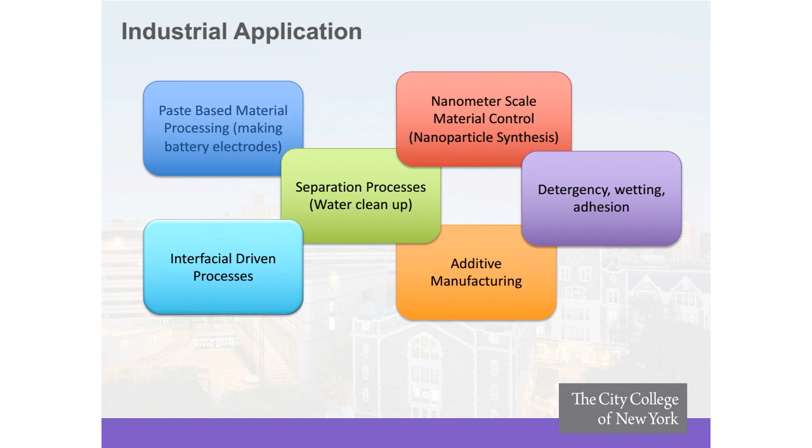to print both metallic and insulating materials, and eventually evolving these techniques to be able to print things such as batteries by using multiple inks, an ink for the anode, an ink for the cathode, an ink for the electrolyte, and an ink for the separator in one unique step, looking at paste-based processes, which are involved in things like making battery electrodes, and finally understanding the processes at interfacial driven materials and reactions, such as what happens at the interface of a metal anode and the electrolyte, and what controls our ability to generate power out of that corroding anode during the discharge of a battery.

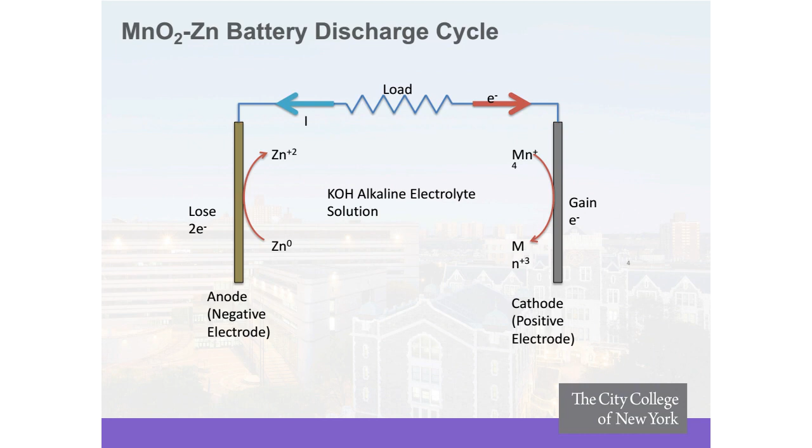In the first example that I've mentioned, we are focusing on batteries that are using the chemistry of the manganese dioxide zinc metal anode. In these cases, I'll focus exclusively on the anode for the purposes of this presentation. We basically have metallic zinc that upon discharge actually corrodes, oxidizes from Zn0 to Zn2+, and the Zn2+ species are actually soluble in the alkaline electrolyte that we use. During charging, these species actually replate onto the anode by accepting 2 electrons, and they form metallic zinc again.

These processes, while they appear to be very simple, are actually complex in the sense that we do not know what intermediate species adsorb on the metallic surface. We also do not know what the rate limiting steps for these processes are. And at the same time, on the actual anode, there are other competing reactions, such as the electrolysis of water that generates actual hydrogen during this process. And so, in order for us to be able to increase the efficiency of the battery, we need to minimize the parasitic reactions, the electrolysis of water, while figuring out how to overcome kinetic or mass transport limitations during the charge and discharge of the zinc anode during the battery operation.

If one were to focus on the particulate nature of the zinc anode, one will understand that the zinc particles, as they undergo corrosion, actually only their surfaces corrode. And very much as a core shell model, the oxide surface increases in size and eventually dissolves in the electrolyte. The metallic particle begins to decrease in size, and the biggest problem that one runs into in these kind of situations is that the particle-particle contacts begin to diminish or are completely eliminated, and so the actual conductive pathways for electrons to allow for the corrosion process to occur are eliminated, and there is no conductivity pathway to the actual interface between the zinc and the electrolyte.

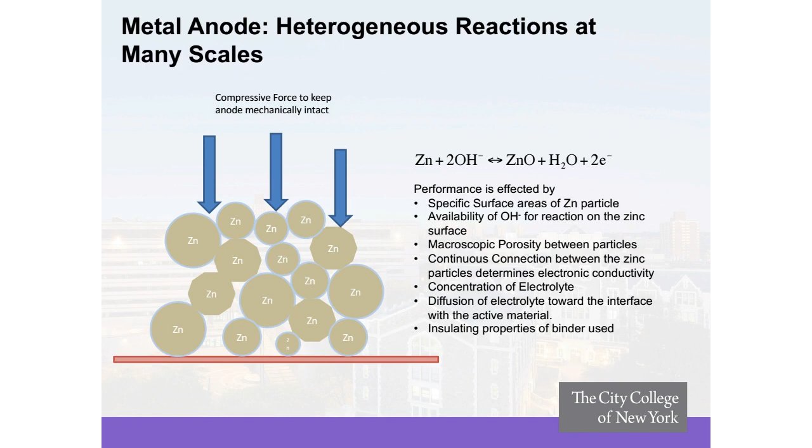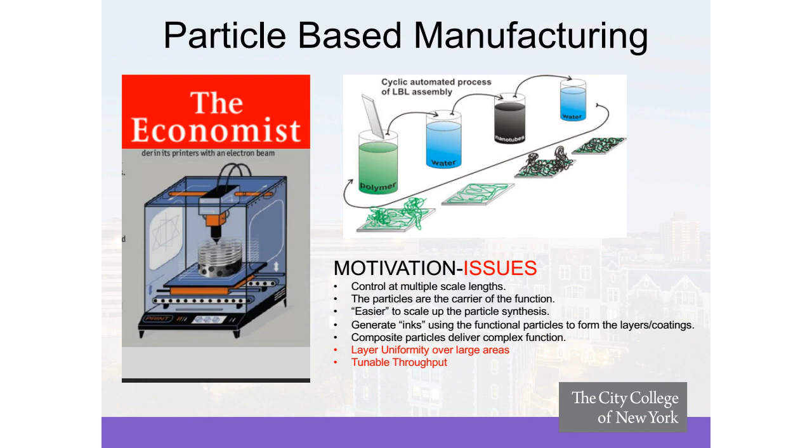Our motivation, thus, for this field is to actually build inks or materials that are representative of anodes or of the cathode material, or even the electrolyte and the actual separator, and use 3D printing to allow us to print architectures of batteries where we've maximized the area to volume ratio so we can increase the power generation during the discharge of these batteries, and at the same time mitigate any type of transport problems that occur during the operation of these batteries. Furthermore, this allows for a much easier way to build batteries in unconventional environments.

Another area of interest in my research lab deals with the templating synthesis of materials and looking at different templating mechanisms. Specifically, we're interested in being able to use soft templates, such as liposomes or vesicles, where we can introduce these organic self-assembled structures to inorganic materials and synthesize using these organic layers as a template. Such a particular example allows us to use a transcriptive synthesis where the vesicular or liposomal structure is used as a template to grow on the outside of that surface a very thin layer of a metal oxide, such as silica, and so we can generate hollow spheres.

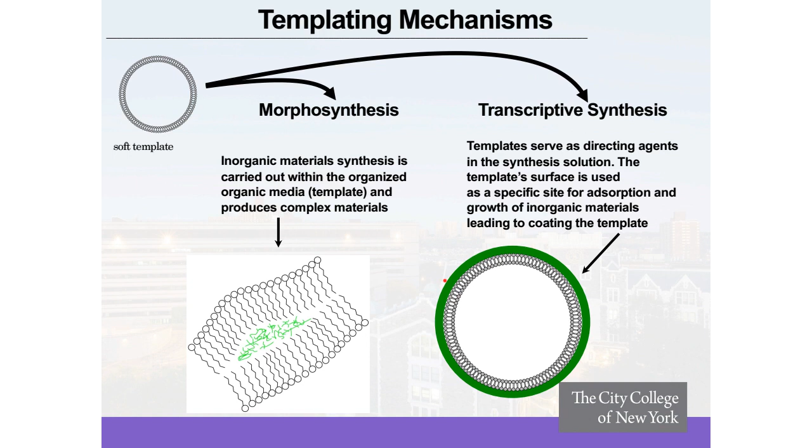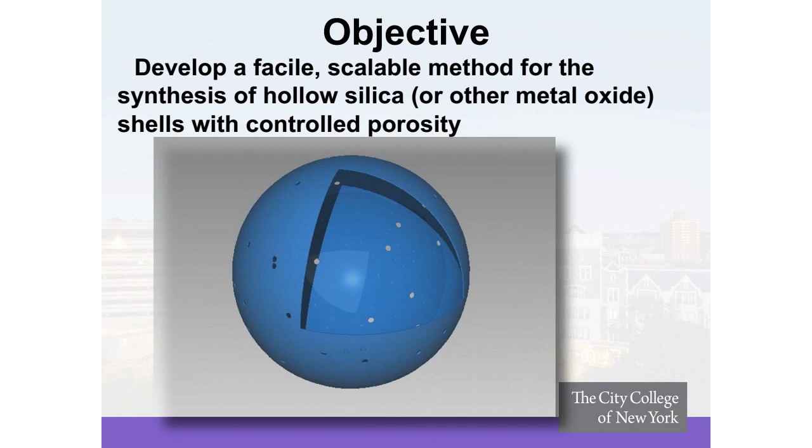By controlling the porosity of the shell, we can now have a scalable way of synthesizing hollow silica particles or other metal oxides, and we can control the exchange rate between the inner and outer domains by controlling the number density of the pores and the size of these pores. These pores again are templated by the presence of polymer chains that are incorporated in the actual vesicle wall.

Once these particles are formed, they can be actually assembled through a colloidal assembly process into thin films, forming colloidal crystals, or basically colloidal membranes. And the porosity through these membranes is actually controlled by the pore size of each one of these particles that allows the diffusion or the permeation of a gas or of another species of preference through that material.

Furthermore, we can functionalize the surfaces and the actual pore surface in such a way that we can also chromatographically separate out materials as they permeate through these colloidal crystal assemblies.

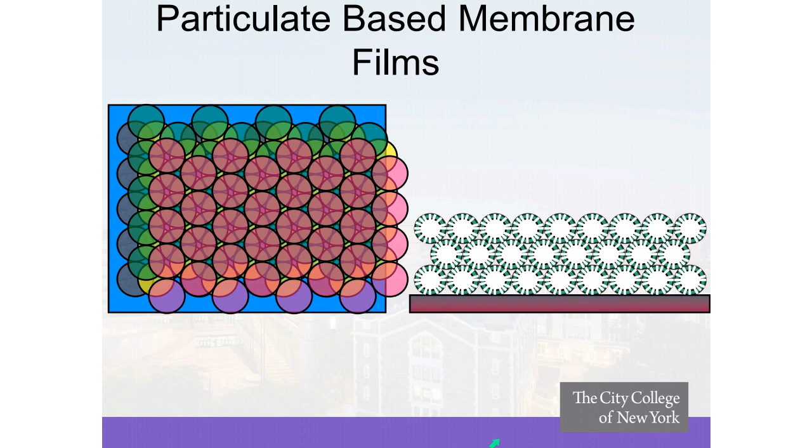Another approach where we can utilize wetting phenomena or selective interfacial interactions between a liquid or two liquids and a solid substrate is for the separation of oil and water using meshes that have antagonistic wetting properties. So, for example, if we have a mesh that is wettable by, let's say, a water phase, but not wettable by an oil phase, then by utilizing this approach where only the water droplets are going to be able to move through the mesh pore while the oil droplets will be captured, one is able to phase separate water from oil quite efficiently.

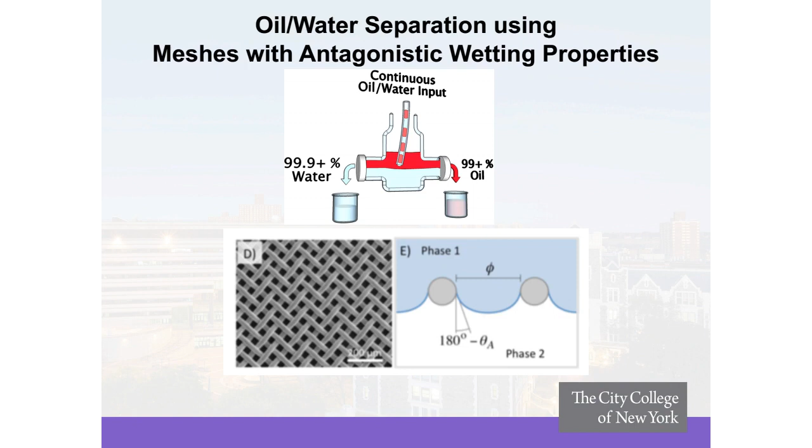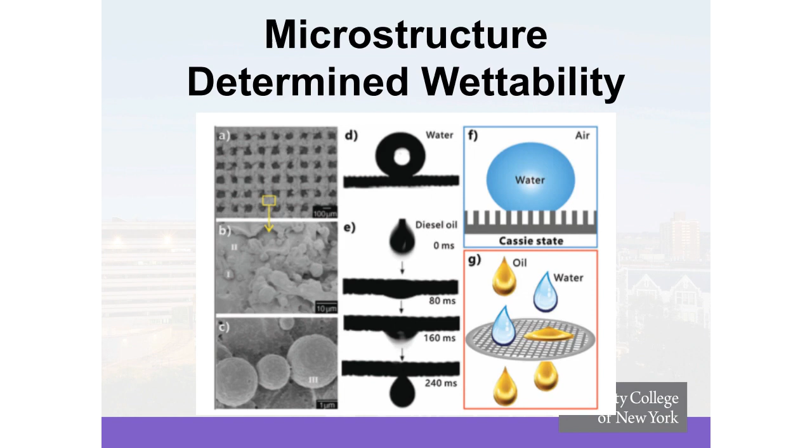Furthermore, the porosity, the wettability of these surfaces is determined really by the microstructure on the metallic substrates or the actual substrates of the separator. So controlling that microstructure allows us to have surfaces that are either wettable by water or wettable by oil.

The final project that we are very interested in the lab deals with particle adsorption on surfaces, and one can very easily understand these types of interactions that occur when a particle approaches a substrate. Whether it will adsorb or not on that substrate depends on the specific interaction of the particle with the actual substrate. It will also be determined by the particle-particle interactions as well as the particle-solvent interactions and the strength of the solvent-solvent interactions. This set of 4 interactions pretty much determines the extent of adsorption of a particle onto a substrate.

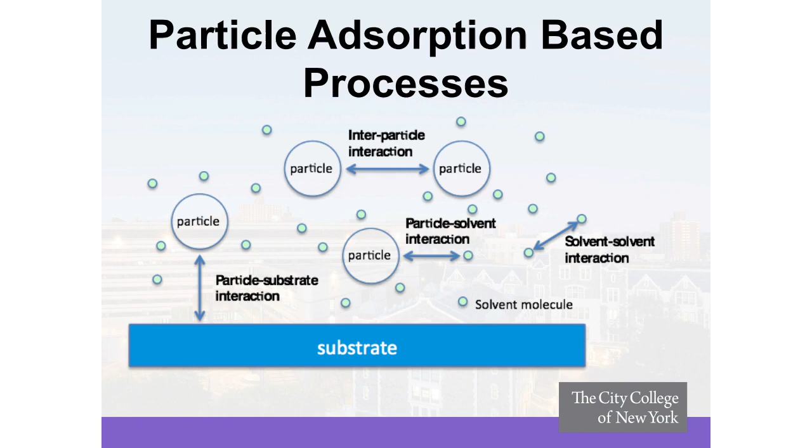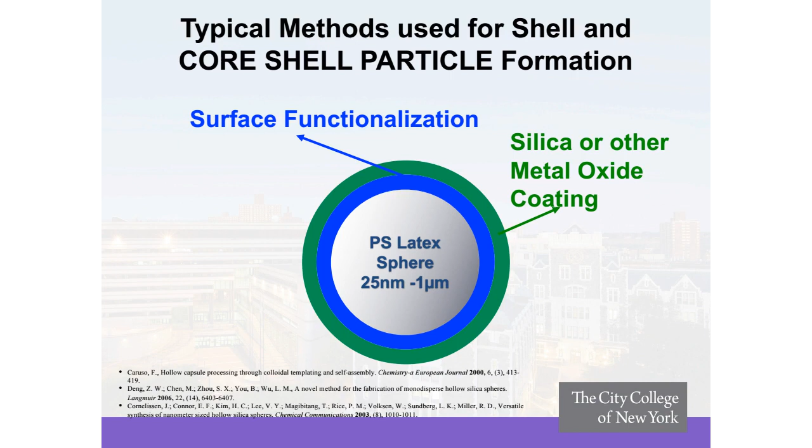As part of designing functional materials through these templated approaches, we've also developed techniques in our laboratory where we can not only form hollow shells, but we can also form core shell particles where there is a core functionality, typically a metal in our cases, that is coated with a particular shell. And then these particles can be assembled onto substrates using approaches where we tailor those 4 interactions mentioned.

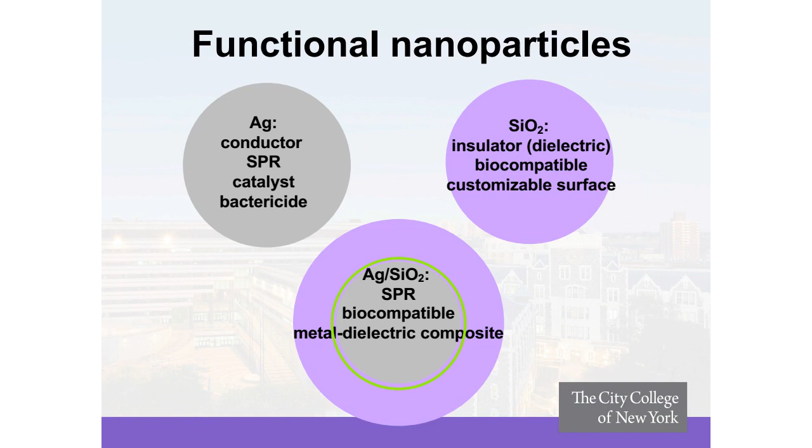Specifically, the material that we have been looking at in the lab is a silver core that is a conductor and can be used either as a catalyst or as a herbicide or a bactericide. We're using a silica insulator shell that also can be a titania shell. It could be also a zirconia shell. And the combination of the two actually allows us to generate a metal dielectric composite.

We can use these metal core dielectric shell particles to actually form thin layers of very high dielectric constant materials for the purposes of fabricating high efficiency capacitors. The presence of the metal core in these particles allows for a very high polarization at the metal dielectric interface that increases dielectric constant. And because the dielectric shell prevents the actual percolation between the metal cores, we end up with materials that have very high dielectric constant.

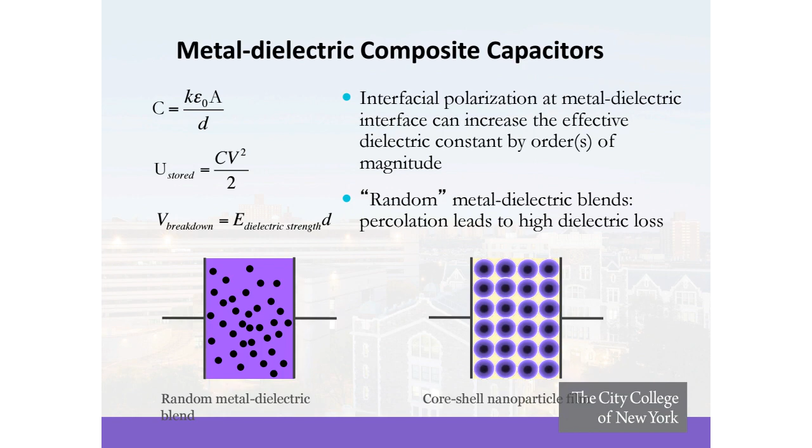So one can think of these cases where we are building, in essence, peanut M&Ms, the peanut being our metal core, the chocolate being our dielectric material, and the color of the actual candy is the surface modification that we functionalize each particle with. The ability to functionalize each particle allows for a very straightforward way of arraying these particles onto a substrate using interfacial electrostatic interactions.

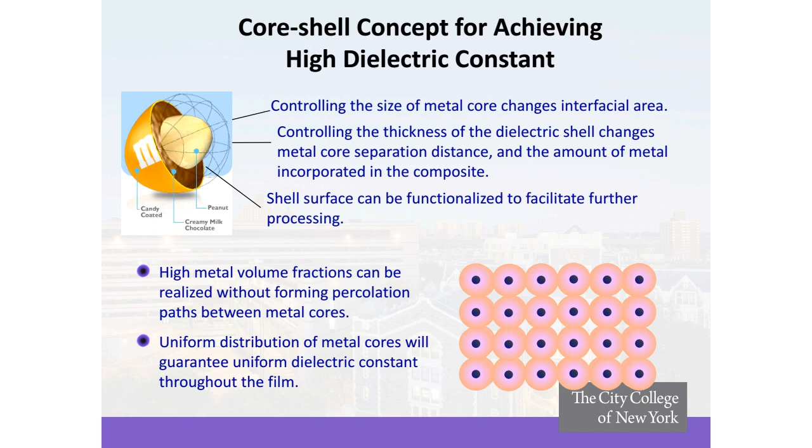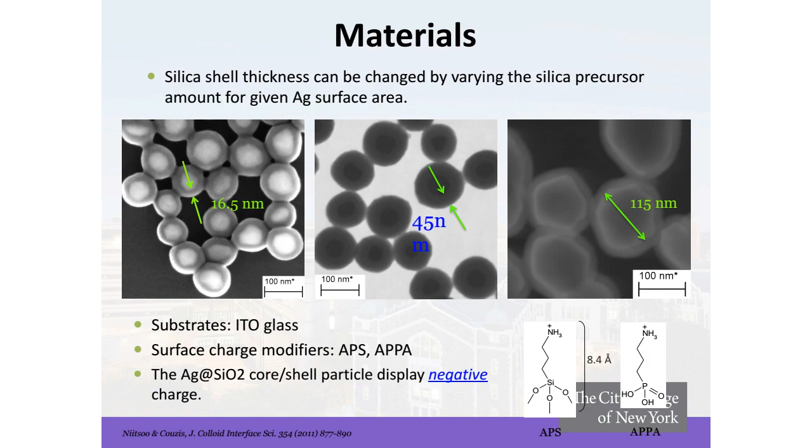This is a picture to show you that the process is actually quite robust, and we've been able to scale these particular core shell manufacturing processes. We can have cores and shells in the range of 16.5 nanometers, all the way up to 115 nanometer total diameter of the particle. And we've learned how to build large enough quantities of these materials so that we can overlay hundreds of layers of these colloidal particles onto a substrate for the purposes of forming macroscopic capacitors, where we can now measure the performance of the device.